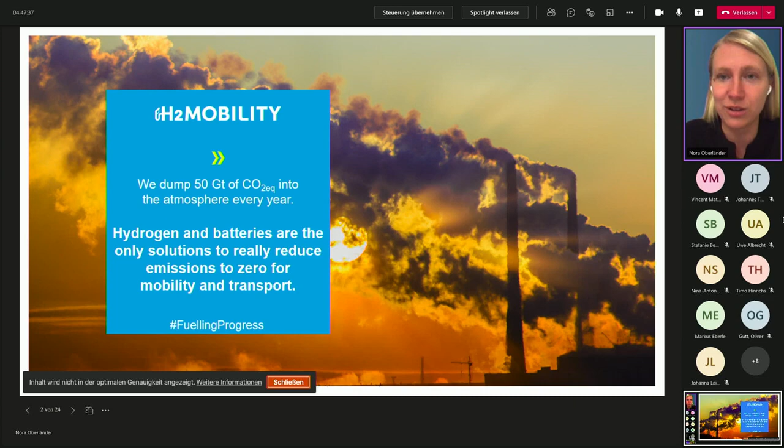So let me start with the why. Why are we doing all of this? Because we dump way too much CO2 into the air and we have to decarbonize the mobility sector. You probably all know 30% of all the CO2 accounts for the transportation sector, and hydrogen and battery vehicles are really the only two solutions we have to decarbonize the sector.

Also, hydrogen is really useful because it uses less raw materials than other technologies, and currently we overuse the raw materials we have on our planet.

Also, we're aiming for 100% renewable energy, and we need energy storage solutions to store all this intermittent energy that we will have. Hydrogen is a really useful solution to store this energy over a long time.

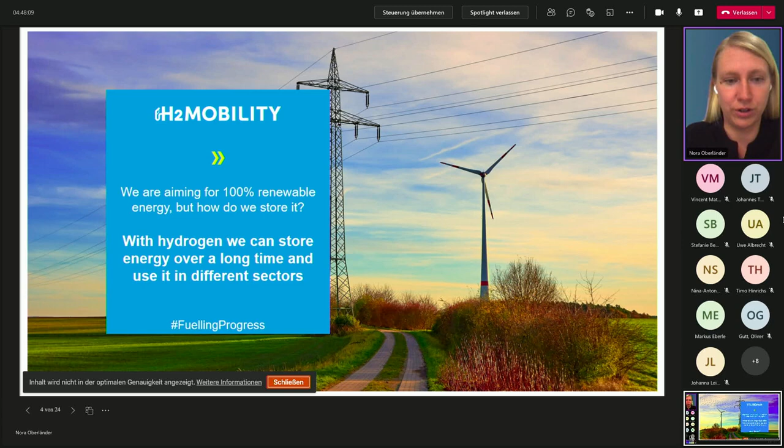Looking at the transportation sector, we see that there's not going to be a one-size-fits-all solution anymore. We will have different vehicles and different technologies for different use cases.

For example, battery electric vehicles are useful if you have low weight requirements and not so high range requirements. On the other hand, fuel cell electric vehicles are really useful if you have higher weight requirements, if you want to take on a lot of load, and you also have high range requirements.

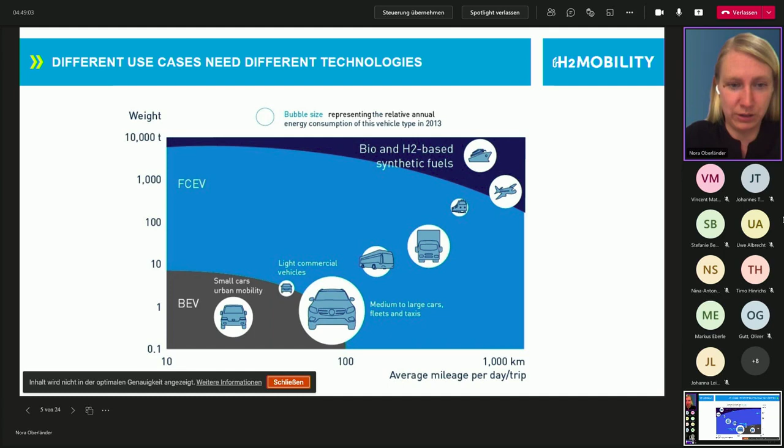So looking into the heavy duty sector, as well as buses with long range requirement, and also for different use cases with passenger vehicles, and looking into the heavy user applications like ships or aviation, hydrogen will be really useful. So what is the role of H2 Mobility in this?

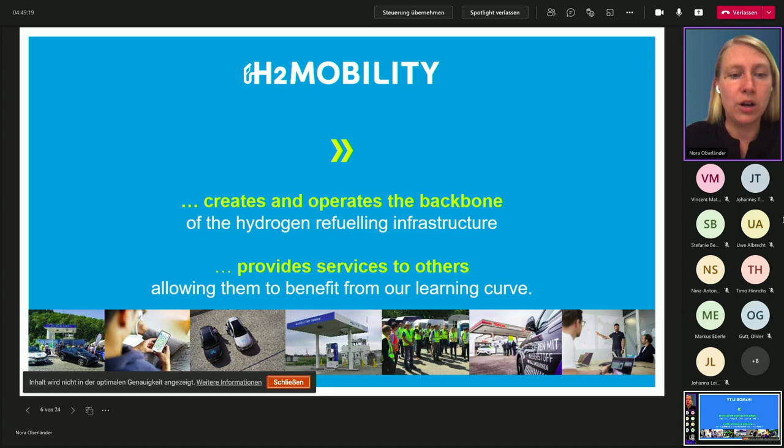H2 Mobility builds, plans, and operates the hydrogen infrastructure in Germany and also in Austria. We are building the backbone of this hydrogen ecosystem, and also we provide services to other companies.

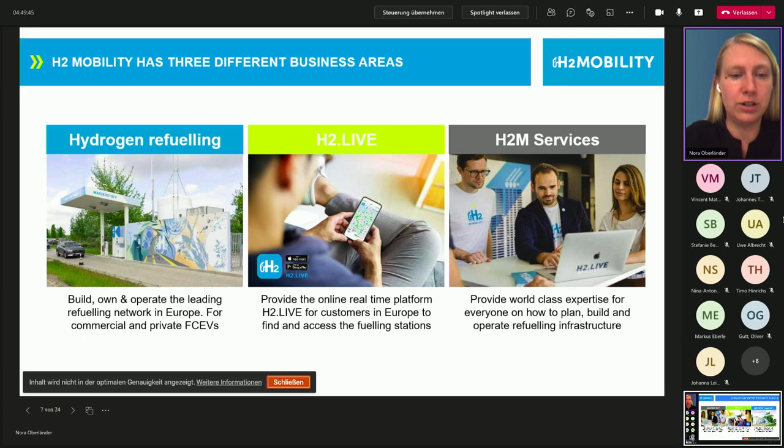So having these three business areas in H2 Mobility: building and operating the network, also having a digital solution for our customers. H2 Live was already mentioned before, where you can see real-time information about the hydrogen refueling infrastructure, and also the different services that we offer, sharing all our knowledge with other players.

So when H2 Mobility started in 2015, there was the chicken and egg problem. There were no hydrogen stations, therefore no vehicles, and no vehicles because there were no hydrogen stations. This is why H2 Mobility started to build up this infrastructure.

And this infrastructure is not built overnight. You really need some time to plan the refueling station. They are complex systems. They're also expensive. And this is why we had to have some time to build up that infrastructure.

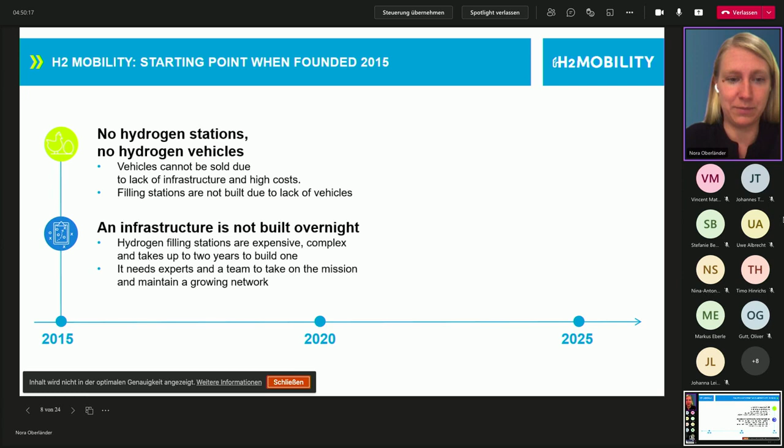Behind us, we have really strong shareholders from the oil and gas industry, as well as OEMs, to really build this integrated system between infrastructure and also the vehicle side.

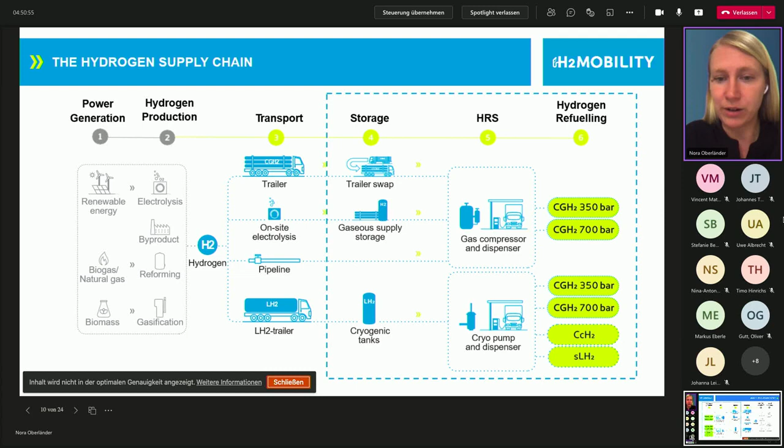We operate in the second part of the hydrogen supply chain, looking at storage at the hydrogen refueling stations. We store this liquid or in gaseous compressed form, and then we provide the refueling to the vehicle with 350 bar, 700 bar compressed gaseous hydrogen, or also in the future cryo-compressed hydrogen or subcooled liquid hydrogen.

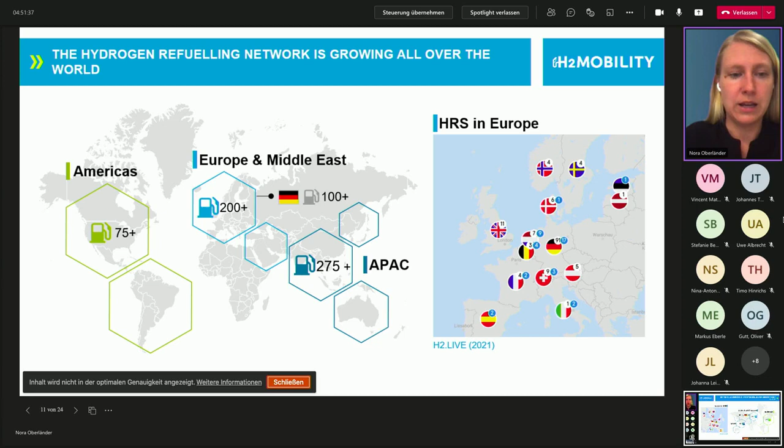Zooming in into Germany, Germany is a really special case because here we have connected all cities, all logistic hubs, with now over 90 stations. This makes H2 Mobility the leading hydrogen network operator worldwide.

And we have conducted over 120,000 vehicle refuelings, which means that we have a lot of experience with that, and we have an average availability of over 95%.

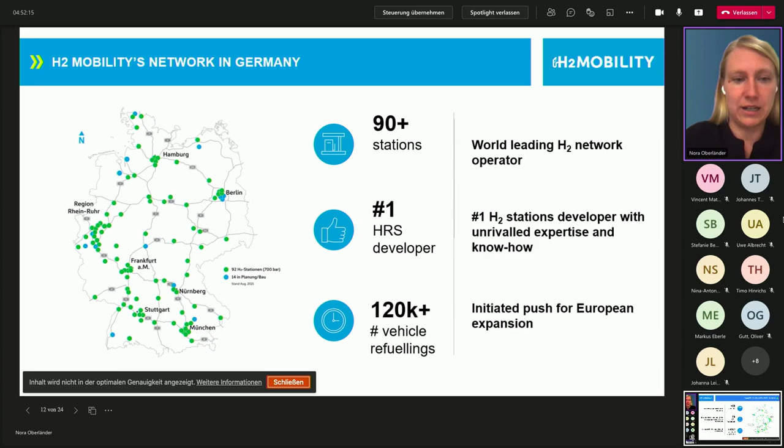Now showing some use cases that H2 Mobility has been active with. Looking at cars, buses, also garbage collectors, and also trucks that are refueling at our refueling stations currently, I want to point out some success stories.

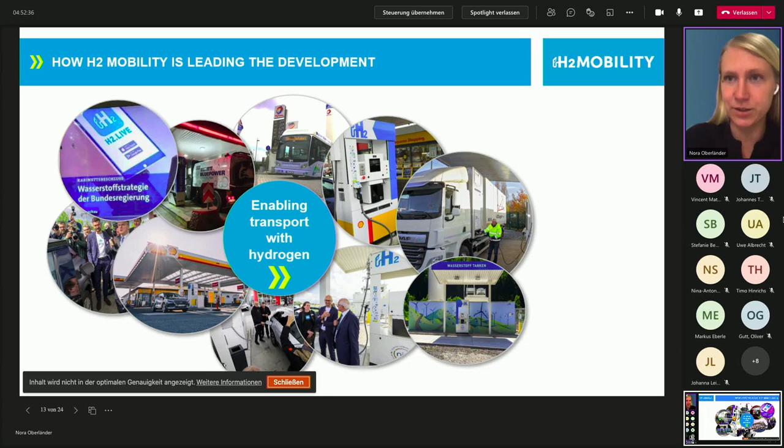One success story is Faun. Faun is a garbage collector company, a vehicle manufacturer company in the north of Germany. When they switched from their ICE engine to a fuel cell vehicle, they approached us, and we developed an integrated approach so that their vehicle setting and their engineering is also really in line and optimized for the refueling station.

Furthermore, just pointing out another example, we see the local bus operator in Cologne that is now operating over 35 fuel cell electric buses. They could use the normal routes that they had beforehand, and they have a smooth operation with the long ranges they require.

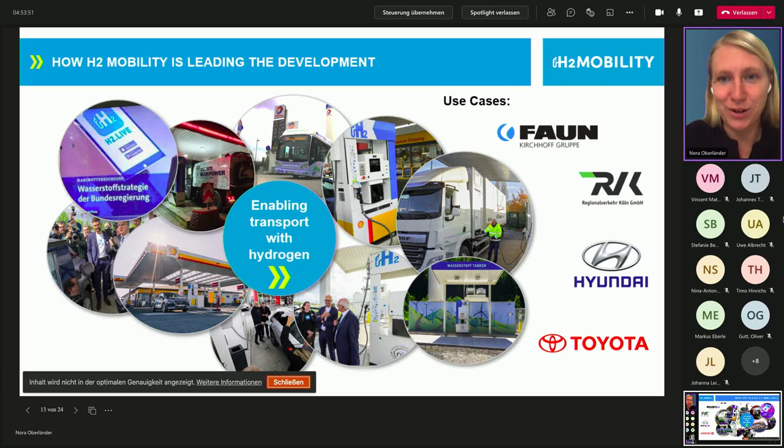Also, we see Hyundai. We've heard from Hyundai earlier, with the Xcient fuel cell in Switzerland, but also now we're looking at integrating more of the trucks into Germany. The Toyota Mirai, the new one, is also really the customer's favorite at the moment. We already have a huge demand from the new Toyota Mirai at our stations.

So as I said, we had this unconditional rollout beforehand where we built the basic network coverage. Now we are looking at a strategic regional growth, where it's really about demand-oriented hydrogen network expansion, and where we build only where there's also demand. Mainly saying that we need a demand of around 50 tons after 3 years, so that the refueling station is also operated profitably.

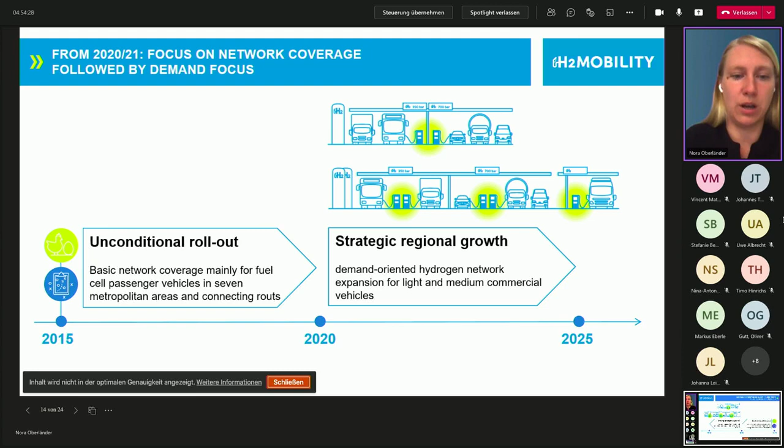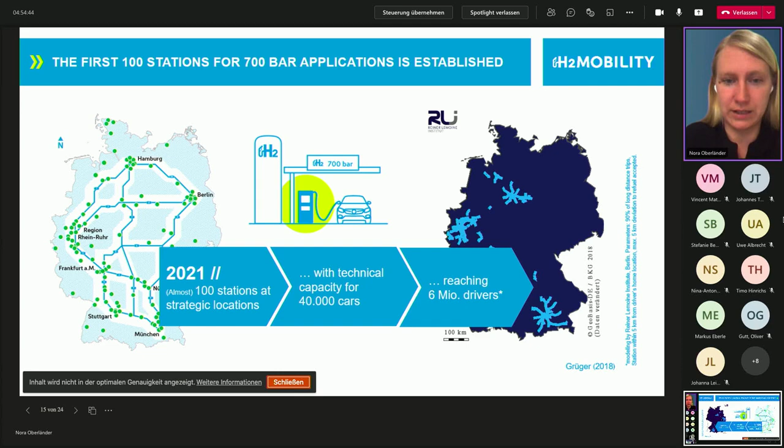In this unconditional ramp-up phase, we have created almost 100 refueling stations with a capacity for 40,000 cars, mainly 700 bar, reaching over 6 million drivers, but not only 700 bar with refueling up to 10 kilograms. We also have almost 10 stations where you can refuel up to 42.5 kilograms with 350 bar.

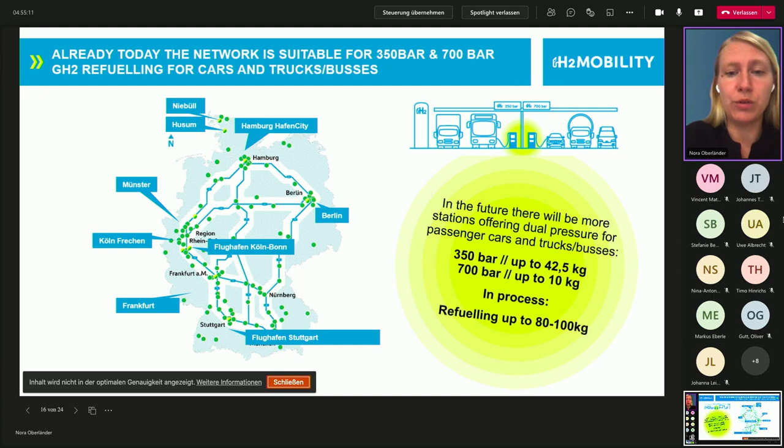This is mainly used for buses and other light-duty vehicles. We are looking into the future refueling for especially trucks of up to 80 to 100 kilograms, because if you look at the development we see until 2030, there's a demand shift coming from personal vehicles and cars towards the heavy-duty sector, which is really hard to decarbonize with battery electric vehicles alone.

We see that there will be a lot of heavy-duty fuel cell vehicles in the market by 2030. In our scenarios, that will account for 80% of our demand, because they also just have a way higher demand than cars. And we see 355,000 tons of demand coming just in Germany in 2030.

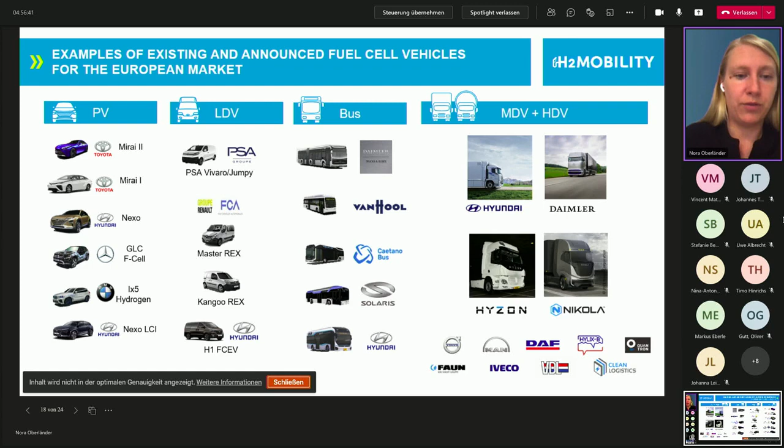We have Daimler - we also heard from them with the Gen H2 truck. And we also have other players like Hyzon or Nikola looking at the European market with numbers of heavy-duty vehicles.

So to meet this growing demand, we will also offer bigger refueling stations. Currently, we have mainly offered S and M refueling stations for passenger vehicles, light commercial vehicles, buses, and medium-duty vehicles, with a maximum hydrogen throughput of up to 500 kilograms. In the future, we're going to look at offering L and also double XL stations, with a maximum hydrogen throughput of up to 4 tons.

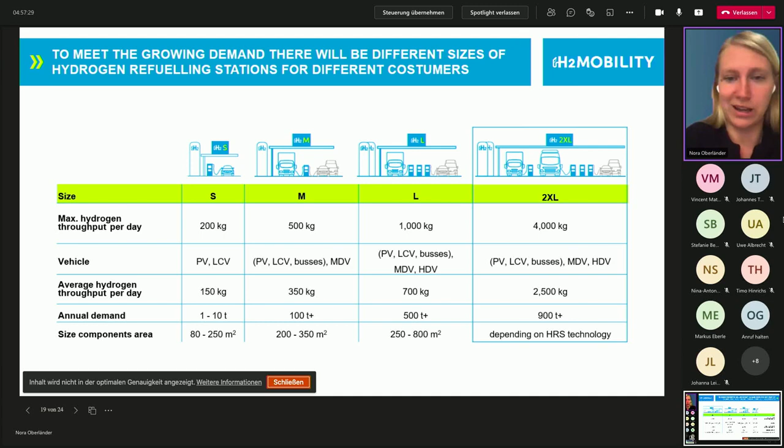This is really going to offer every vehicle class a refueling option, and mainly also looking at heavy duty applications. To give you an example of how that could look, an XXL 700 bar compressed gaseous hydrogen station could look somewhat like this. We would imagine a trailer swap scenario with medium high pressure storage, compressor units, and then the dispensers here.

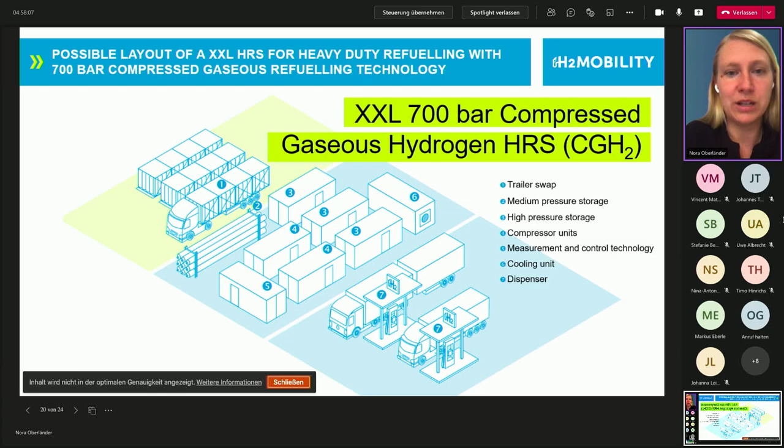This is still a prototype phase or a conceptualized phase, and it doesn't have to be just 700 bar, but also cryo-compressed, as we're going to hear later from Cryomotive, or also SLH2 as Daimler is favoring.

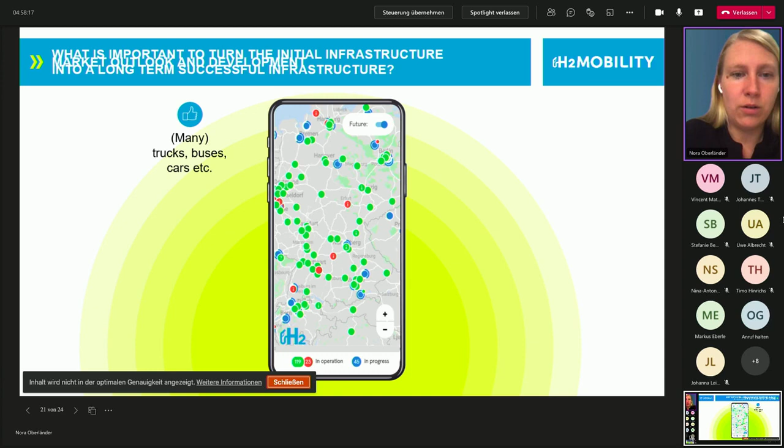So looking into the market outlook, we really see there are going to be a lot of vehicles - buses, cars, trucks - coming into the market. This is why we need an expansion of the refueling network all over Germany and the EU. For example, the IPCEI, the projects of common European interest, have an EU integrated strategy where H2 mobility was chosen to integrate all the projects in Germany.

We really have to look at this heavy duty segment Europe-wide, because Germany is such an important country for the transition and for the logistics area. We have to make decisions on what heavy duty standards we're going to use, because of course the infrastructure, technology and storage technology should be the same as the vehicle side. We shouldn't have too many different approaches.

The technology race is still somewhat open, but we see that we really have to decide on some sort of standard, and the CEP is doing great work there, so we can have a smooth integration of infrastructure and the vehicle side. Of course, it's also about scaling production on the vehicle side and the infrastructure side, to reduce TCOs for the customer.

Today, this industry is still highly reliant on subsidies, and in the future we have to reduce the TCOs to meet customer expectations. We are seeing that we can reduce the cost to serve by 80% until 2030, mainly driven by reduced cost of hydrogen and the scale up of green hydrogen, but this is still a really ambitious goal. There are also going to be more digital service offerings for customers.

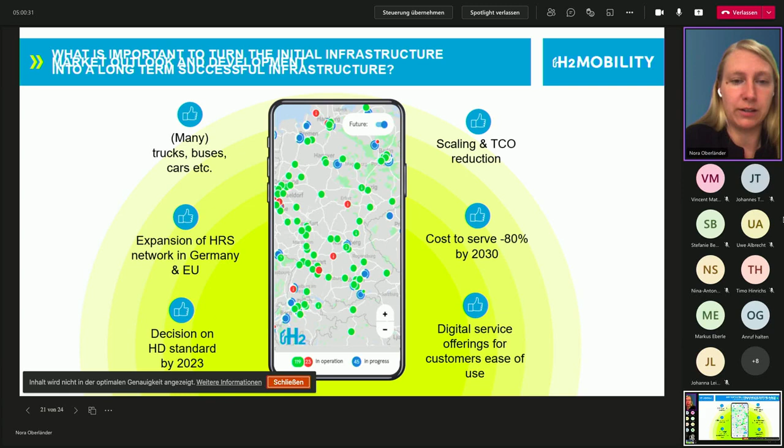So as a summary, we see a rapid increase of fuel cell vehicles in the market, and also the necessity of it, and also demand from customers. Therefore, we will be building a hydrogen infrastructure all over Germany and all over Europe, with bigger hydrogen refueling stations to serve all sorts of vehicle types, from passenger cars to heavy duty applications.

The heavy duty sector is especially interesting because technology-wise it's still open, but we need to have an integrated look on infrastructure and vehicle to really have a smooth operation there. The cost reduction and scale is essential to the whole industry to be profitable in the long term, and green hydrogen production needs to be scaled and also used in mobility, not just in other sectors.

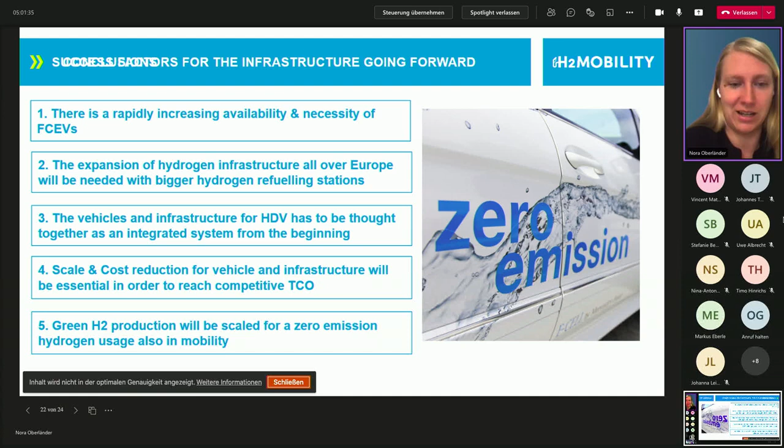So the future of zero emission mobility is starting already, and we are excited to lead the transition on this.